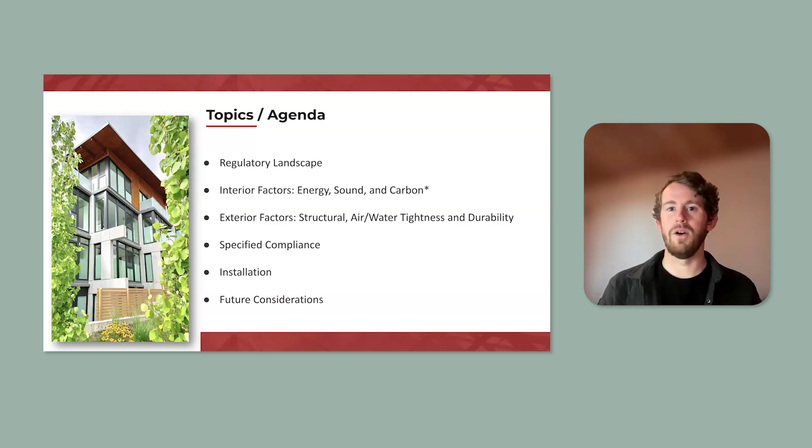All right, so right off the bat, as I mentioned, I'm going to talk about the regulatory pyramid. So right at the top of the pyramid are acts. Acts are legal requirements for an industry. Most industries have an act that's applicable. In the window and door market, we actually only have one in BC. Everywhere else in the country, there are no acts that are applicable. There used to be an Ontario Act, but that's actually been rescinded, and so that is no longer an applicable act for our purposes.

So acts are interesting in the sense that they typically act as point of sale requirements. They say you cannot sell this product unless you meet X requirement. It also gives enforcement levers to the province and to the federal government to determine, if the product is not meeting that compliance, how they deal with it. So that's kind of a unique thing, because as we go through the rest of the regulatory framework, you really don't have those levers built in.

So codes are obviously the most common item that we're going to be talking about when it comes to regulatory framework. It is really where most of our requirements on the window and door side come from, or at least explicitly. They are the thing that we all go back to, and they say, okay, this is a minimum requirement for a particular area, whether it be the NBC's model code or the provincial codes.

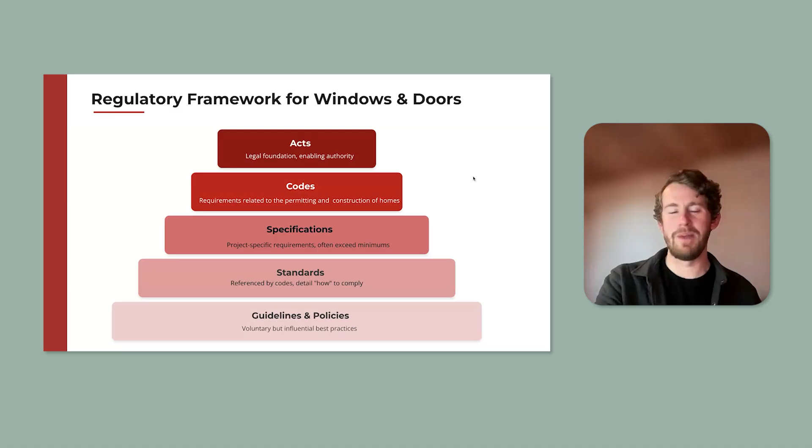I also wanted to help this group understand the difference between a Part 9 building and what is called a Part 3 building. You'll often hear me say a non-Part 9 building because calling it Part 3 is kind of comical, at least in my own space. In the window and door space, if we're looking at a multifamily building, you're actually regulated by Part 3, Part 4, Part 5. So I'll call it a non-Part 9 building.

For Part 9 buildings, these are small single family dwellings meeting a certain amount of square foot space. Really, your codes are going to dictate a prescriptive method, at least that's the intent. Part 9 was always designed as a paint by numbers type of system where you've got prescriptive requirements that you need to meet in order for that building to be signed off by an authority having jurisdiction.

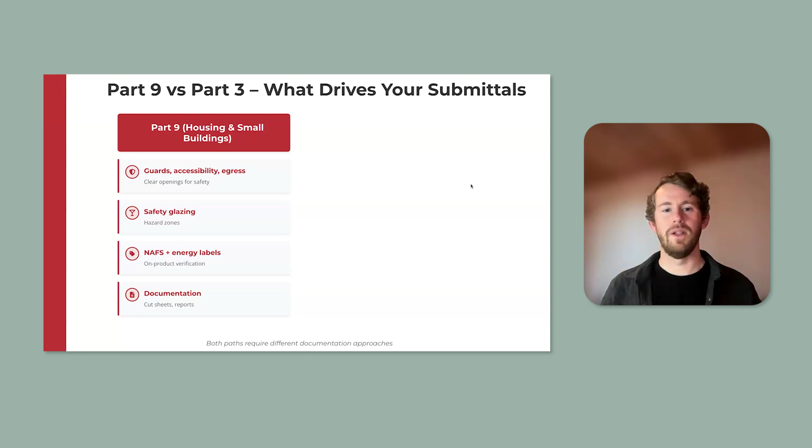Over time, that has become more complicated. There is some serious discussion, especially in BC, about what that future looks like, since we've got elements within windows and doors that become more performance managed than prescriptive managed. There's going to be continued conversations about that because it really did change the way Part 9 works. But on the whole, Part 9 leaves you with needing labels on your products, safety glazing with certain minimum requirements, and some basic documentation a project will ask for, but ultimately it's a paint by numbers system.

Part 3 is going to be more complicated because you're going to have consultants and engineers involved, and there's going to be a shop drawing phase the window and door manufacturer has to go through in BC and growing throughout the rest of the country. You're going to have Schedule B and Schedule C, which are professional sign-offs. You're going to have mock-up testing, which I'll talk more about in installation, but is absolutely critical because of how much risk a multifamily building takes on.

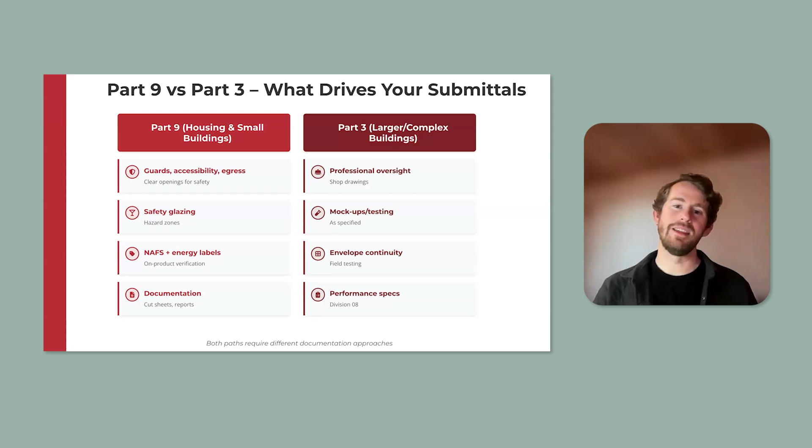You're going to do water testing in many portions of BC. You're starting to see air tightness testing. Toronto has some of it showing up, Alberta has some of it showing up, and you are seeing a growth of envelope consultants around multifamily buildings. And then you're going to have specifications that call out specific things beyond the code requirements or the act requirements.

We've got two areas we're really going to focus on today. First is the interior environment: how well your envelope maintains the interior space. Can your window and door keep the heat in or the cooling in? How much sunlight is going to add heat to that interior space? How clear is the glass you're seeing through? And what is the resistance to condensation for that product? That's interior environment.

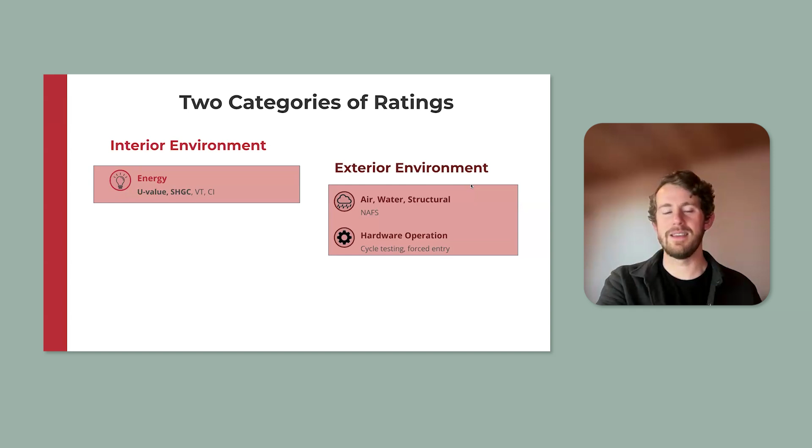Exterior environment deals with how well your product resists the outside pressures: air loss, water penetration, or structural support, how well your window holds up under stress. There is also a bit of hardware operation. I loosely call it durability of hardware, but it's the wrong word. Ultimately, it's how well your hardware resists use. It's a bit outside the exterior environment, but it sits within that certification or testing schema.

And last, I've got a series of other regulated metrics that I have a hard time putting into interior or exterior environments. Sound is one we can talk a little about; that's almost exclusively in the specification space. Egress and safety is one I wanted to spend more time unpacking, but with the handful of slides related to it, I found myself spending 20, 30 minutes explaining all these pieces, so I'm not going to get too deep into it. There's a little bit of glass safety we'll talk about, but if you have questions during or after the presentation, don't hesitate to reach out.

And then last is carbon. I'll admit, I'm putting carbon into this conversation because it's an early education item. I think our industry, windows and doors specifically, but probably construction as a whole, is a bit underprepared for global warming potential conversations.

But I think it's really important that we're starting to talk about it because even in the 2030 cycle that we are now starting the work for, we are starting to look at what the possibility of component embodied carbon numbers would look like. So I'll explain a little bit of where that's going. It will not be the end-all be-all of that presentation. That really needs to be its own unique thing, but at least I'll get you started.

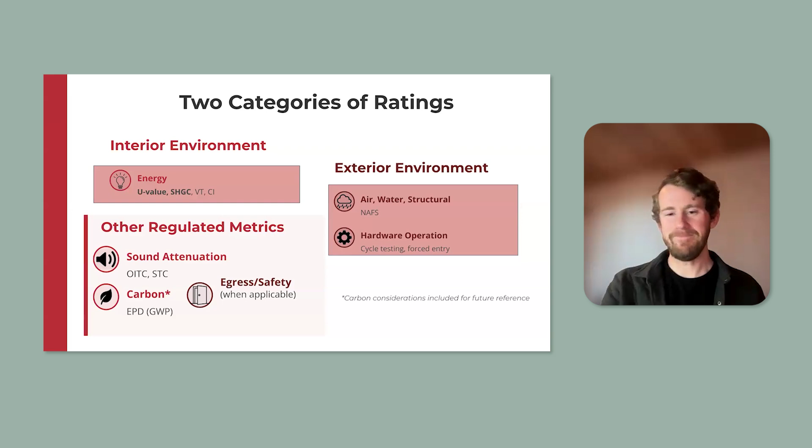So, as promised, I'm going to have a little bit of conversation about standards versus regulations, because this is an interesting piece that I kind of struggle with, if I'm being really frank. In an ideal world, the regulations give us explicitly what must be done in a building whenever you have a product. That would give the means and methods to dealing with what that product needs to do once it's in the building. And then standards, ideally, should be test methodology that provides the metrics that define certain aspects of that product that are applicable to how it's supposed to be used.

I'll admit that's not necessarily what's happening in a lot of cases. When we talk about NAFS specifically, it gives us a lot of instruction on what should be done. NAFS is the North American Fenestration Standard. I'm going to spend a lot more time talking about it in a minute, but it defines the structural, air and water tightness of a product. It also tells us when we are going to be applying labels, and a little bit of how they are to be applied.

In truth, the regulations have actually offloaded a lot of their responsibility to the standard. And so you get this confluence of what the standard should be doing, what the standard is doing, versus what the regulations do, which I think is sometimes why NAFS can be a complicated thing for people interacting with it: a lot of the requirements are actually embedded in the standard itself. We'll talk a little bit about that, but I want to frame this first because it is where things get a little complicated, in my view.

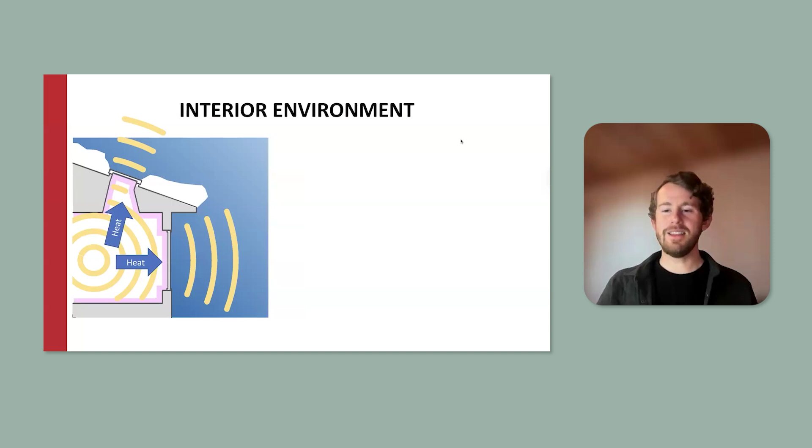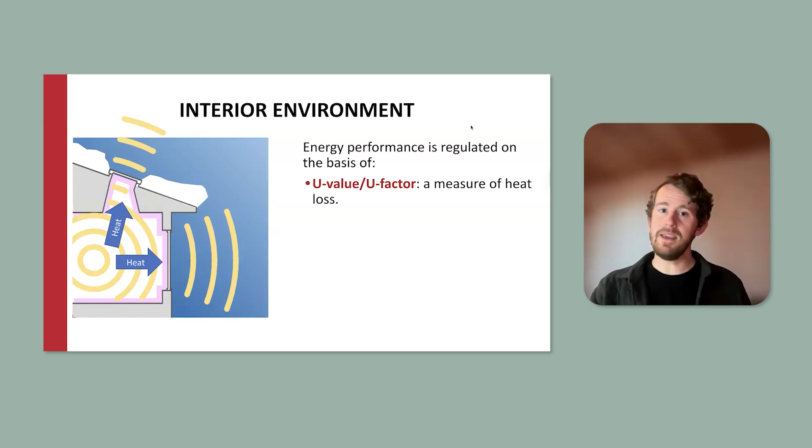So let's start into the nitty gritty of this conversation, starting with interior environment. Interior environment is regulated on the basis of U value, and in BC, only U value. We'll talk about what specifically needs to be on the label, but when it comes to the metrics you need to prove, your U value is the only piece you need to worry about. Outside of BC, especially in the National Building Code, the Energy Star system has what's called an ER rating, or energy rating. That is recognized as an energy compliance path through Part 9, so you could meet an ER rating in lieu of that U value.

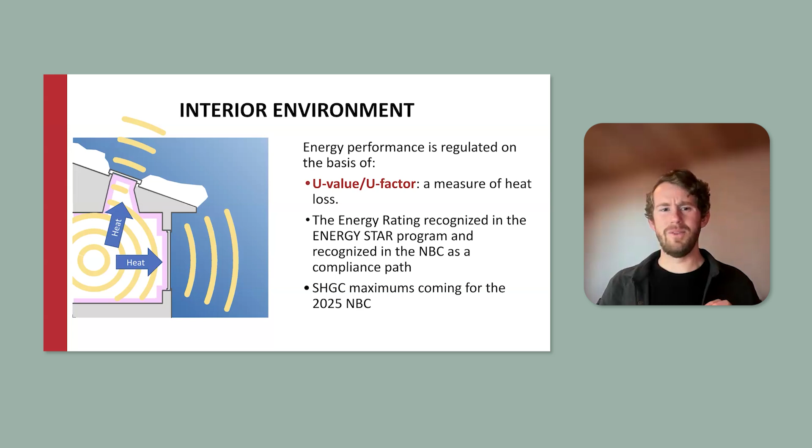I'm not sure how long that will last. There are definitely signs that some of that needs to change, and a portion of that is solar heat gain coefficient, or how much solar radiation is coming through that glass and being added to your interior space. There are some restrictions coming in the next version of the code. The issue the industry often has with an ER rating is that it prioritizes as much heat through that glass as possible; the way the calculations work, it almost views it like free energy. In Vancouver or Toronto, that's really tricky because your environment's actually pretty warm to begin with, and if you start adding heat, that can create overheating potential.

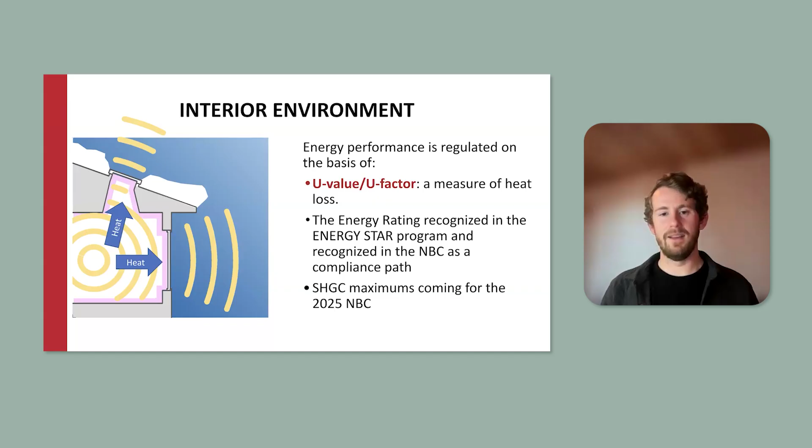I've got a slide that I'm going to do my absolute best to simplify; it actually came out of another presentation, so bear with me. We're going to get into a deeper conversation about solar heat gain. But for your purposes, U value is really your regulatory item. Solar heat gain is coming. ER, when you get outside of BC, is still an item.

All right, so energy efficiency acts. So as I mentioned, there's really only one, and we have it here in BC, that the BC Energy Efficiency Act dictates a point of sale requirement that no windows or doors can be sold into our market with a worse than 1.61 watts per meter squared number.

So, U value is, if you have a higher number, it is a faster loss of heat. If you have a lower number, you have a slower loss of heat. I know that oftentimes it's easier to view this as lower is better, but I think it's actually really important that we think about lower is slower instead.

So this requires mandatory product testing. Then there is energy certification and labeling, or testing and labeling. So you have to label your product in BC. And this act is actually one of the very few things that help create that requirement outside of the standard telling you have to label it. So there's a lot more to kind of poke at about this.

As I mentioned earlier, acts are one of those few places where enforcement levers are kind of built in. So the province or the Ministry of Energy and Mines has the ability to say, if you've got a product that's in the market that's more than 1.61 and it's manufactured, I should specify that, then you can actually have that window rejected at site, or it should be rejected at site. It is a legal requirement.

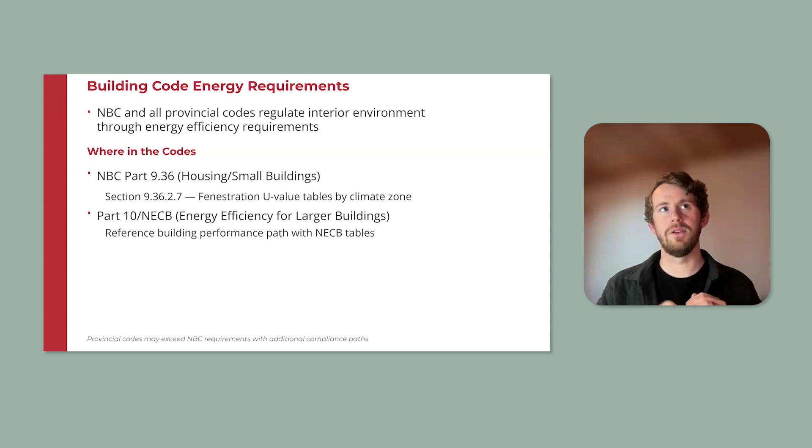All right, so when it comes to energy efficiency, where you're going to be looking to make sure that you are being regulated, in the NBC, that's going to be 9.36, and 9.36 is also going to be where you originally look for BC. I'll talk about provincial variations here in a moment, but let's start there because it gets weird once we get to BC. And then for a Part 3 building, you're going to be looking at Part 10 or the NECB for determining energy efficiency requirements for products.

Again, when you get to Part 3 buildings, a lot of this is performance based. So it's going to be an energy advisor that is going to be helping sculpt what the window requirements are, given the context of what you did with your walls and what you did with your insulation and what you've done with the rest of your envelope requirements.

So when it comes to provinces, BC is absolutely its own beast. It is so hard for me to help people understand outside of BC how BC works. The BC step code is my example of a guideline that has become a code. So, just because I think it's kind of interesting, the way that worked is that the BSSB uses what's called an OIC, so an order in council, in order to take this guideline and then apply it as an amendment to the code. And so, the OIC is oftentimes used as kind of a fail-safe measure to convert critical items.

So in BC, we have our BC step code, and it's a voluntary effort. So each municipality gets to choose what step they wanted to play in. Up until the last couple of years, where that change in the BC step code because of the OIC was then implemented for an absolute tier 3 baseline requirement. So all of the municipalities have to meet that tier 3 or that step 3 requirement.

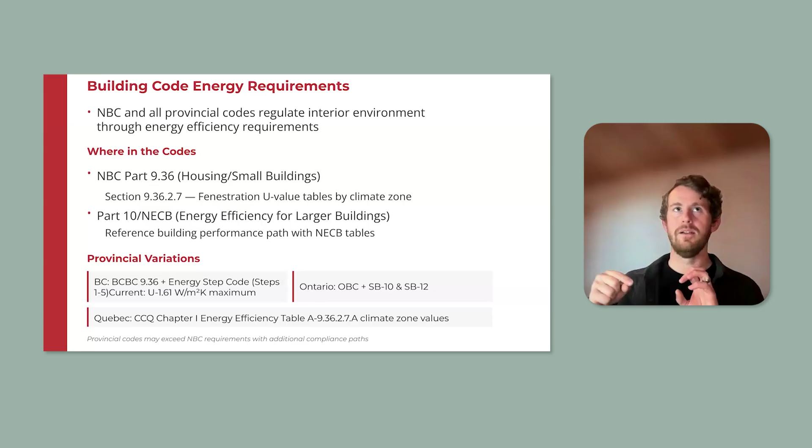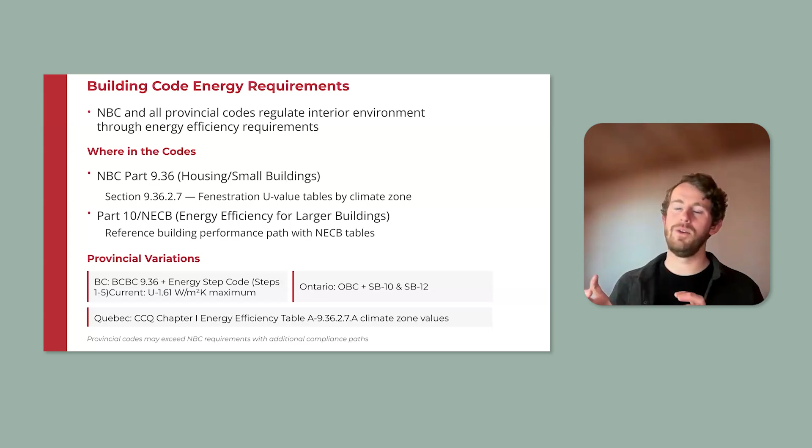What that means in practice, and especially for this last cycle and probably this cycle coming up, is that the provinces will do their best to remove what I'll call provincially specific artifacts. They are items or ways the code is written in their province that is unique, that really has very little bearing or difference from what the national building code does. And so a lot of the work that BC specifically has done is remove so many of those artifacts so that it is as aligned to the national building code as possible.

I think there's a misconception about the provinces needing to essentially adopt in full the National Building Code. That is not what's being asked of the Accords. What is being asked is that it is as close to that as possible. And if you have legitimate policy directives, then you can make differences to that, which actually gives the provinces a voice back to the National Building Code, that it allows kind of for this push and pull between code cycles

where one province like BC will have items that they feel are really important. And so they'll bring that back to the National Building Code, like, hey, we don't want to change this because this matters to us. And so then the National Building Code reviews it and decides whether or not that's appropriate for the rest of the country. Anyway, long story short, but I wanted to make sure I put in kind of that harmonization conversation.

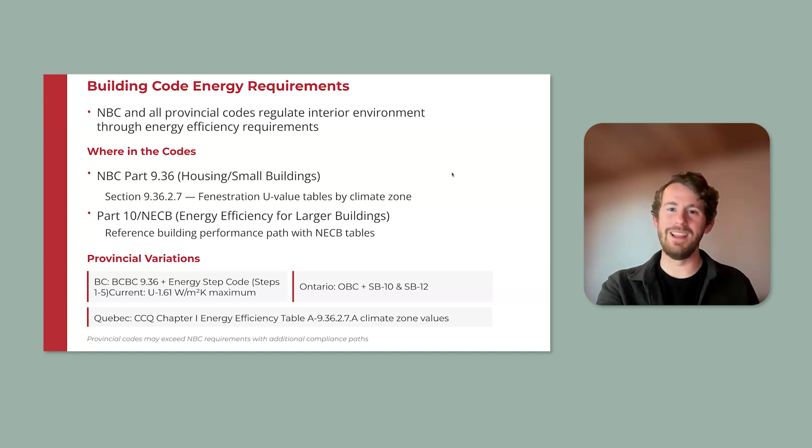So as I mentioned, I kind of went through the BC step code in Vancouver. Vancouver is kind of unique. They actually are a charter city. They have their own code. There's a lot to discuss about that, and I'm not getting into that here. But the Vancouver Energy Modeling Guideline is a really good example of a guideline that has become a code requirement. And the reason that has happened is because both Vancouver's code will reference the Vancouver Energy Modeling Guideline and the province's code will reference the Energy Modeling Guideline. And so the requirements that are outlined by the guideline then become codified.

BC Housing guideline for part 3 buildings is a great example of it; it winds up illustrating the requirements for a part 3 building when you're working with BC Housing.

I'm actually really grateful. BC Housing has spent a lot of time with us in the last little bit working on specifications and cleaning up the window and door side. So anybody from BC Housing, thank you very much for all the effort you guys are doing. We can see it. I'm acknowledging it.

The Toronto Green Standard is interesting. I think it's gone through a bit of a wringer in Ontario because of some of the changes; there is an act that came through that made something like this guideline not applicable. There's push and pull there. I think Toronto is pushing back, and I think probably for the better, in the sense that it's similar to the Vancouver Energy Modeling Guideline, where this is Toronto trying to say we would like to take a more aggressive stance on this particular item. We believe we have the right to do so.

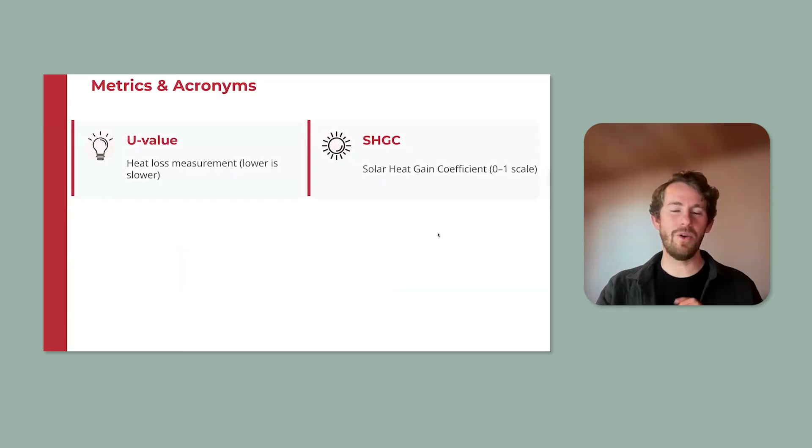On their CPD site you can actually look up the manufacturer and look up all the different certifications that they have for their product for the various types. We're going to talk about the complication of that here in a bit, but for now, these are the two test methods. So those two test methods are going to provide us U value, solar heat gain coefficient, condensation index,

and visible light transmittance. Your U value is going to be determined by a hot box or a guarded hot box test. So you're going to have a warmer interior space and a colder exterior space, and then you're going to be able to test what the heat loss is through that element.

Solar heat gain is you're going to have the visible light transmittance. So I think it's 390 to 730 nanometers, if I remember my numbers correctly. But in that space, that's your visible light. And then you're going to have a spectrometer or a spectral gadget that is going to help you understand how much solar heat gain you're getting through that glass. And it's going to be on a scale from 0 to 1. 0 being no solar heat was able to get through that, and 1 meaning all of the refracted heat and bounced heat was able to come through that.

Windows are, I mean, there's a deeper conversation about this, but for the benefit of our market, we have to use low E coatings in Canada. And so you're going to have anywhere between like a 15% up to 60 or so percent amount of solar heat gain that you could have.

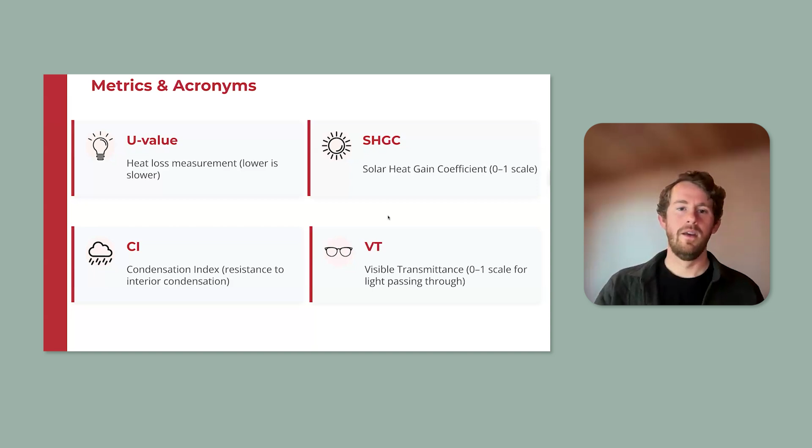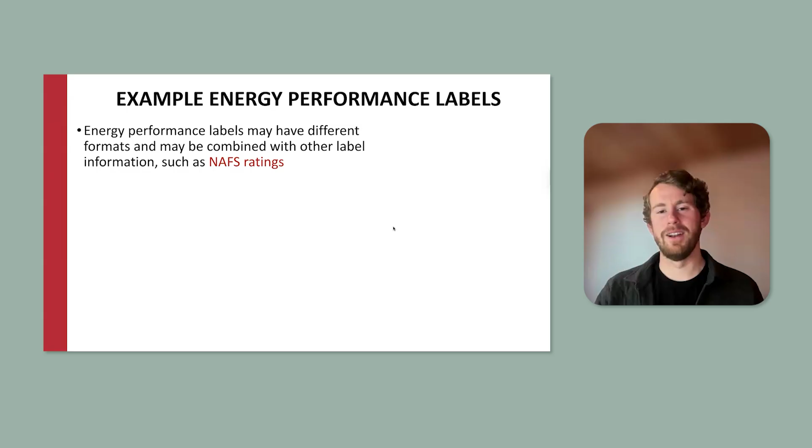All right, so I wanted to give some examples of energy performance labels so you guys could actually see what would be typical to see on site. So energy performance labels are kind of funny in the sense of there isn't a nice, this is the format you need to use every time. There are specific bits of information you need to use, but they can wind up being combination, like this one on the right hand side. They're like combination NAFS labels and an NFRC label.

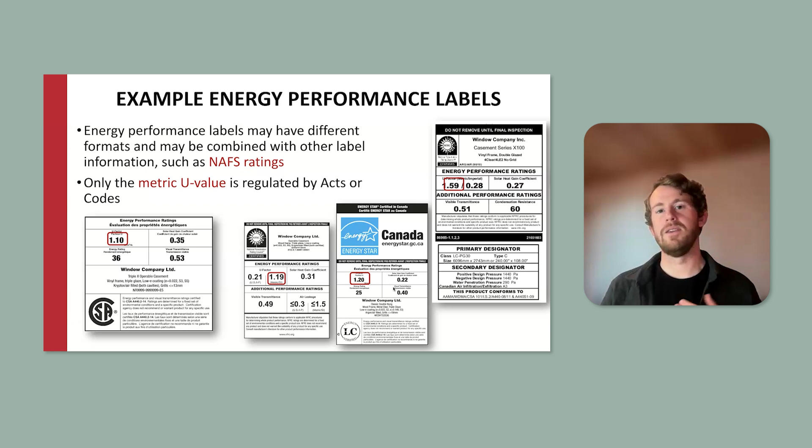But it is worth noting the only metric here that is a regulated item is a metric U value. That needs to be on the label regardless. And so this like 1.10, 1.19, these are all items that absolutely have to be on there. They provide the solar heat gain, energy rating, visible light transmittance, condensation index as, you know, these are things that we already tested for, so they're now available to you on the label.

So the actual label requirements, whenever you're dealing with a temporary label: all products in Canada need to have a temporary label for both the energy efficiency and for NAFS. So you're going to have a U value in metric that has to be there, the name of the manufacturer has to be there, and the certifier has to be there.

I'm going to talk in the next slide about permanent labels, so I'm going to just put a pin in this particular one. But yeah, having a temporary label is an absolute requirement, and in BC, a permanent label is a requirement. I've given a couple of the recognized certifiers just so that people have an idea.

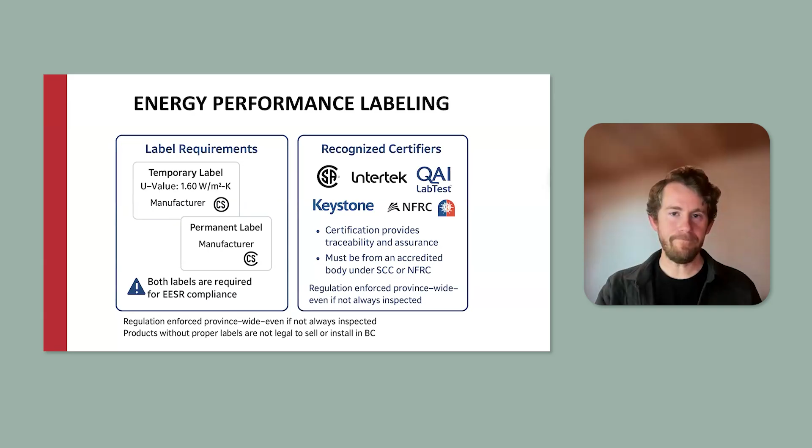So when we're talking about CSA A440.2, again, you need to go through the process of actually looking at each one of the certifiers. If you want to verify the information that you've been given, you've got to go to these guys in order to figure it out. Ideally, you just ask your manufacturer and they will either give you the test labels or they will tell you who that certifier was. So, permanent labels.

It is not defined by any of the codes. The NBC doesn't do it, BCBC doesn't do it, VBBL doesn't do it. So the reason why they're a regulatory item within at least BC is that the building officials of BC created an interpretation that pointed back to a Fenestration Canada labeling guideline that said that you need to have it. So this might be one of the most roundabout ways to create regulation, in my opinion, but in BC, a permanent label is required.

So if you're looking for a permanent label, the definition is that it's not intended for removal without destroying or defacing the label or the product. So a permanent label is going to be on the spacer bar, it's going to be on the glass, it's going to be on the hardware, or most commonly what I've seen is this gold label that sits on the inside of a sash. That's kind of the most common thing that you'll see.

But it is worth noting the rest of the country does not have this requirement. Though I will say, colloquially, the window and door manufacturers just see this as a requirement because if you have to sell your product into the US, you have to have a permanent label. So that's kind of where it has become a commonplace regulatory item without actually being called out as a regulatory item.

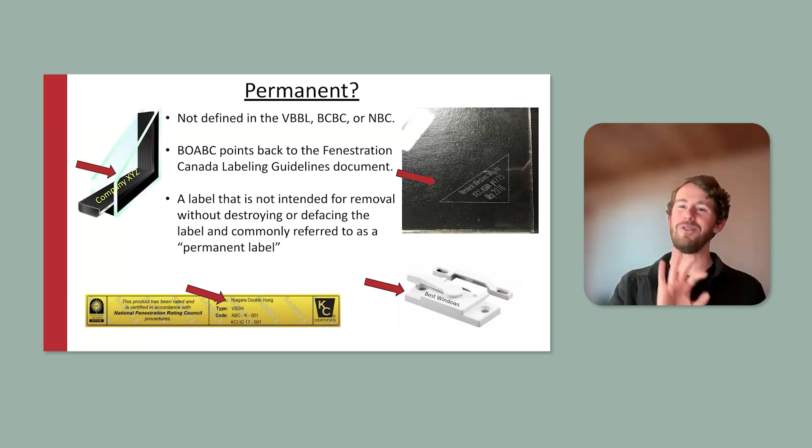So I think it's really important that we have a discussion about standard size versus project size. I think this is something that is just frankly kind of missed in the big scheme of things. But when we go through certification for our product, on the energy side specifically, we have a series of standard size measurements. Really, in the energy space, we're dealing with an apples to apples comparison.

If you buy from window company A, they are going to be testing the same size type of configuration as window company B. So that gives you the ability as the purchaser to see, well, this company performs this way and this company performs this way. So a casement, for instance, is going to be 600 by 1200 millimeters, or about 23 and a half by 47 inches. So the weirdness there is that if you've got a project size that is bigger than that,

your center of glass value, whenever you're looking at windows, is typically significantly more effective than your frame values. So the further you get away from your center of glass, the poorer that window is performing, or the less resistive to thermal loss that window is. It is slower at the center of glass than it is at the edge of the glass.

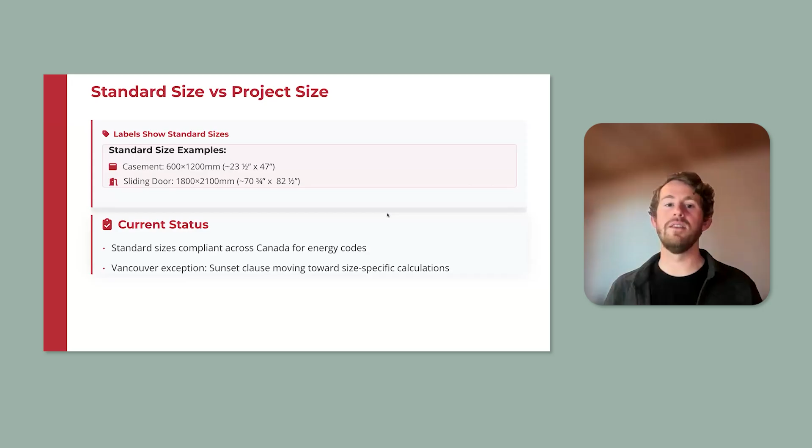There are no expectations of not using standard sizes, even in Vancouver, where there was an item in the energy modeling guideline that asked for size-specific calculations. There is a sunset clause now built into the VBBL for the next 2 years while the industry gets a size-specific calculator launched, which I am really happy to say, luckily Terry Admonson is on this call, and I believe the last time we had that conversation, it was like December 6th.

It's going to be next month. We're trying to get a size-specific calculator launched. And so you can go to Fenestration Canada and you'll be able to take your standard size configurations, put the information into that calculator, and get specific size calculations for your building. And so I think that's a huge step forward personally, that the accuracy of the windows has always been a bit of a question mark.

And U value is one thing where I think there's kind of an acceptable delta within what happens in a bigger size window versus a smaller size window when you're thinking about thermal loss. But on solar heat gain, it is wildly different. And so I'll kind of get into that in the next slide, but expect that's coming. That will be on our site. So look for it by the end of the month in December or early next year, and you'll be able to start using that.

There's also a guidance book that we're creating right now that'll be really helpful for kind of going through the process. It's great for like a multifamily project. We can run through that calculator in 20 minutes and give us exactly what the actual calculations are for the windows. So why this matters for solar heat gain.

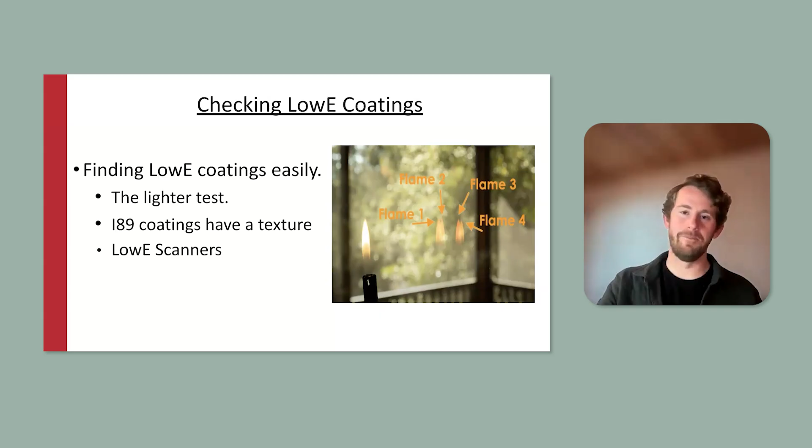I89 is a hard coat that is applied to the interior surface. That's going to have a texture. If you can feel it, that's probably what that is. Otherwise, somebody screwed up and put their low-E coating on the inside, and that's going to be weird and blotchy later, and it'll be really obvious. There's also low-E scanners, so you can use a tool that'll tell you exactly what low-E coatings are there.

All right, so that gets us to the first of the interactive slides and kind of one of our first benchmarks. So I've got a project. The location's in Vancouver. It's a 6-story multifamily building. It's used as residential. So my question to you all is, now that we've talked about interior environments and based off of what you guys think, what's the most important check you could do to de-risk interior environment compliance? Like, what can you do to make sure your building is safer when it comes to the interior comfort of your building, or whether or not your products are actually meeting what is expected?

Do you see any of the answers there, Adrian? I don't. Okay, well, I can share them with you. I have them opened in another screen here.

So we have sound mitigation, solar heat gain, understanding product, use of high performance windows, solar heat gain control, ensuring labeling on all windows and doors, low E coating inspections prior to install, overheating, use an energy advisor, U value and solar heat gain coefficient, check solar heat gain coefficient, change from sliding door to casement window, verify window specifications and verify once installed, structural, U value, supplier feedback, window air tightness, labels, ensure specs accurate for building elements, and U value and condensation index. Okay, that's great.

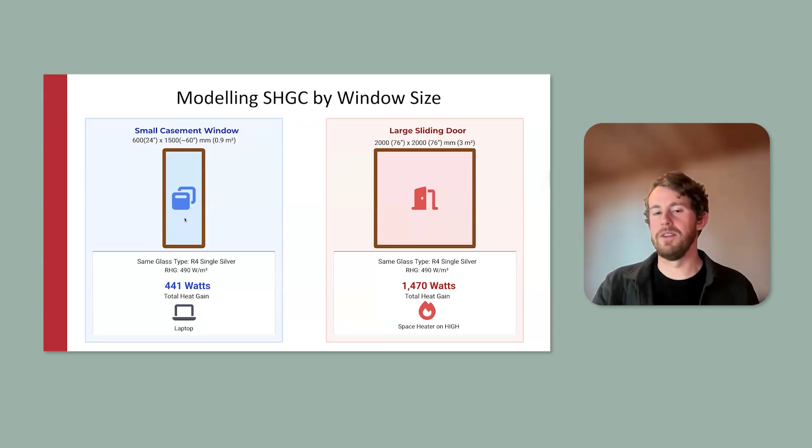There's actually a whole chart that I could send you that gives you a breakdown of zero silvers versus three silvers, and when you're applying it to multiple surfaces. But for your benefit, this is going to be probably about a 0.44, 0.45 type of solar heat gain.

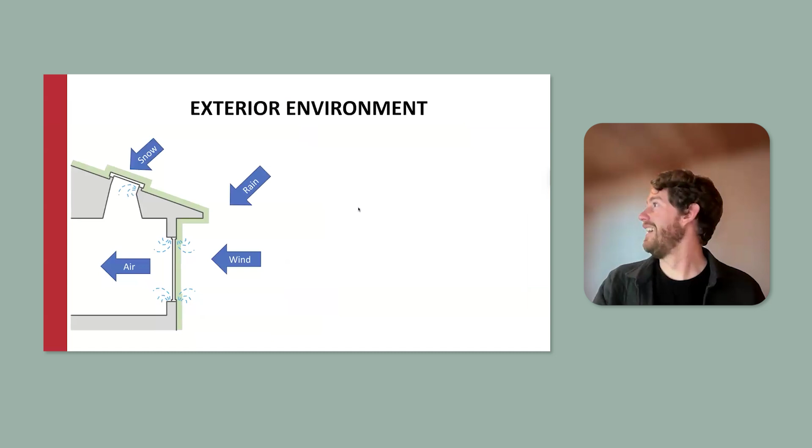So exterior environment. Again, what we're talking about is the products are able to resist exterior load. This isn't going to be anything to do with human occupant load. So guard, for instance, is not defined by NAFS. And anybody on this call that has that confusion, feel free, reach out. We can have a long conversation about guard when it comes to glass and frames, and it's a whole other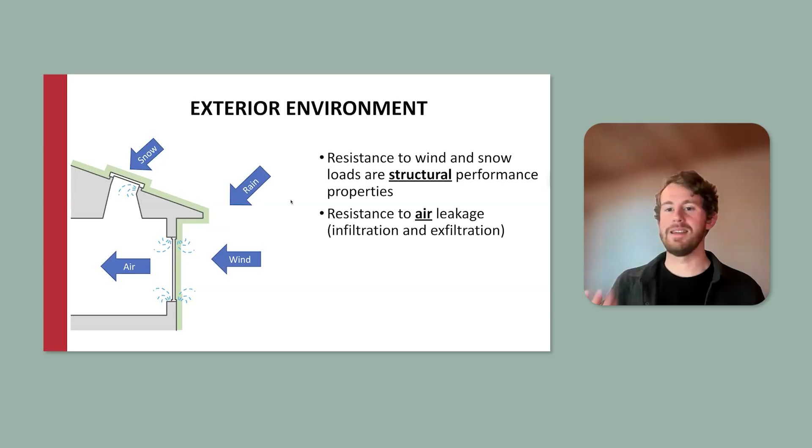conversation. But what NAFS is supposed to do is tell us how is it able to resist snow load? How is it able to resist wind load? How is it able to resist torquing and pressure on its corners? How well does it resist airflow through the product? And then how well does it deal with water penetration when it comes to the product?

So in the building code, this is called out mostly in 9.7. So 9.7 has a whole bunch of items that are related to it. There's also some call outs in part 3, or part 5. It is worth noting, in BC, we have a unique opportunity where the building code is going to give us in a non-part 9 building the ability to engineer some of the tests that are related to NAFS, or the things that might be slightly askew from the testing environment within NAFS.

When we get to the national building code and the rest of the provinces, they've adopted the 2020 change, in which there is no additional engineering path that you can take outside of what's defined. That's a much bigger conversation, but it's probably worth noting that in BC, you still have a fair bit of flexibility with the engineering world to determine what is appropriate, though NAFS gives you some of the best methods that we have in our industry. So that's a little bit of where in the code world it exists.

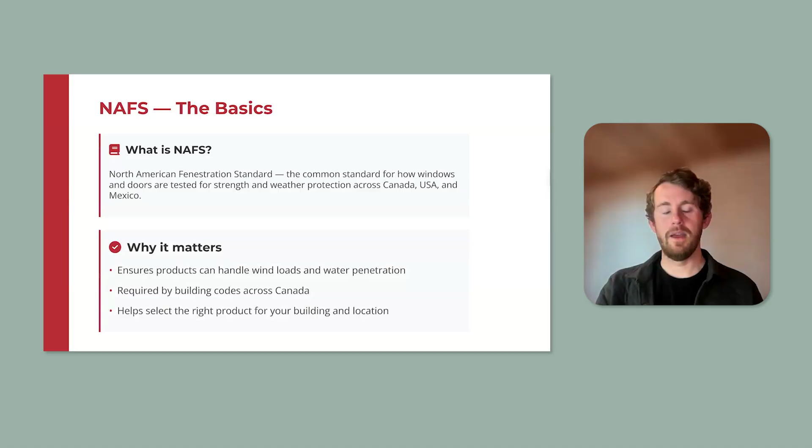NAFS is the North American Fenestration Standard. It is how all of this is dealt with. NAFS is managed by the Joint Document Management Group, which is a combination of CSA and, on the US side, WDMA and FGIA. So those three parties work at creating a harmonized standard between the US and Canada. I'll talk about S1 in a second, but I want to talk about a few of the basics around it.

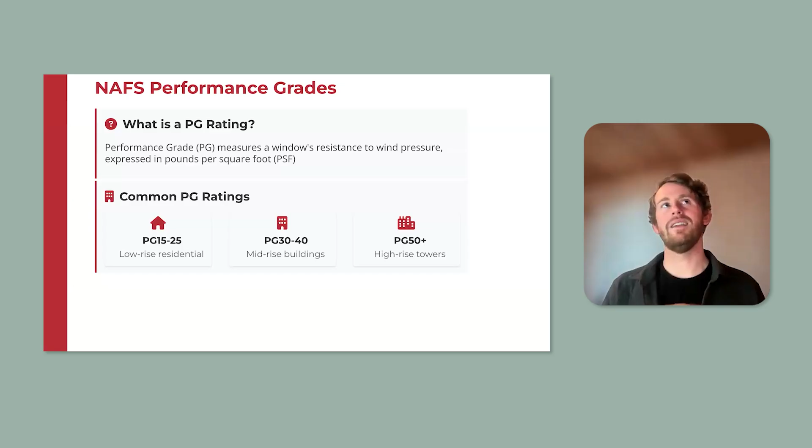So PG is a performance grade. This is a combination metric that you get based off of the window's resistance to wind and structural pressures and water pressure and the location. I'm giving a couple examples of what you typically see for different types of buildings. For a single family home, PG 15 through 25 is expected. PG 30 through 40 is expected for a mid-rise or multifamily building. And then PG 50 plus is typically on high-rise buildings. Even saying that is a bit of a tricky thing, and I'll get into it in the next slide.

But you get into performance classes. Performance classes, in my view, is actually a better way, in combination with performance grade, to help define what's appropriate for different buildings. Each one of the performance classes has gateway testing that they have to do. For R, it's pretty simple. LC adds a little bit of durability around hardware. There's a few other tests that are involved. Between LC and CW, they start what's called the L over 175 deflection requirements.

And I'll call it a miss in the engineering world, but when you get into multifamily, an engineer really needs to be able to say that the product meets that L over 175 in order to meet their own professional engineering requirements. But with NAFS, because of the way the standard is written and the way the code points to it, it actually allows the engineer to say, well, if you've got your NAFS testing and it's meeting the appropriate performance grade and the specifications, I don't actually need to look at whether or not it meets that L over 175.

That's one of my little dirty secrets for the industry. I apologize to my industry.

AW is complicated. In my view, it's very much designed for aluminum windows. It has changed actually a bit in the last iteration of NAFS, and it's actually brought some of the rest of the window world into it, but it had really strict limits that as a material type was only really achievable by aluminum, and then some of the fiberglass companies I think have gotten to a place where they're pretty comfortable in that space.

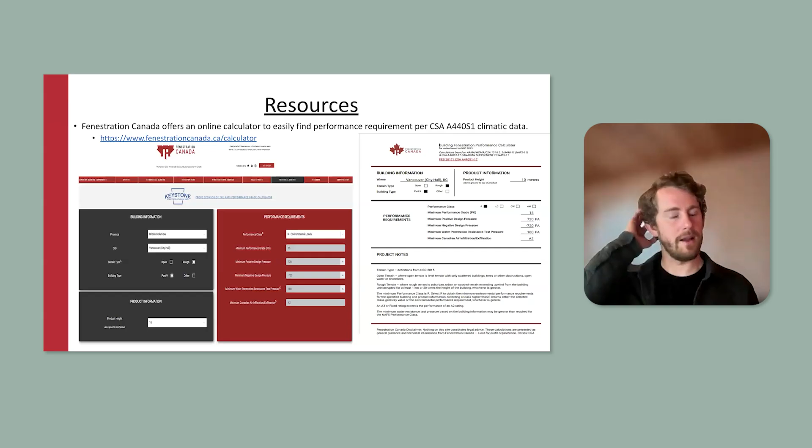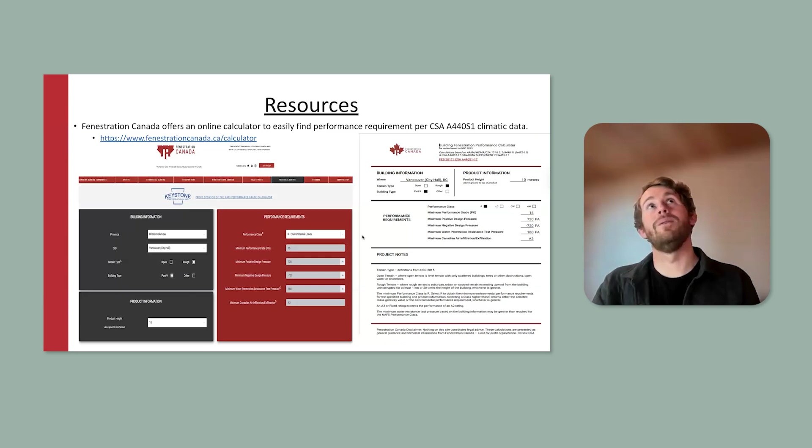I oftentimes used to use this in multifamily buildings whenever there was kind of that debate about what was expected. To just give them the PDF printout that comes out of this calculator, and you give it to the architect, or you give it to the developer, or you give it to the specifier, and say this is probably what's appropriate for your project. So I can't speak highly enough of the tool. I think that was a great thing that we did about eight. Actually, I don't know how long ago that was. I think it's 8 years now, but it might be a little bit longer than that.

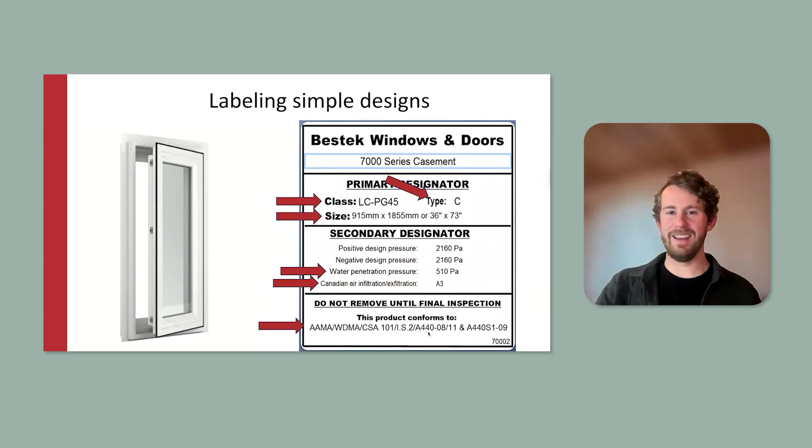Air infiltration, a lot of this A3 type of work is actually now being replaced with actual metrics, but that's a slightly different conversation. And then this at the bottom is going to tell you what it conforms to. So, if you were to see this particular label on site right now, this is not meeting compliance. So, what this is saying is that this is A440-08 and 11. So, it was tested to these two standards. Where you need to be right now is 17 in order to meet compliance.

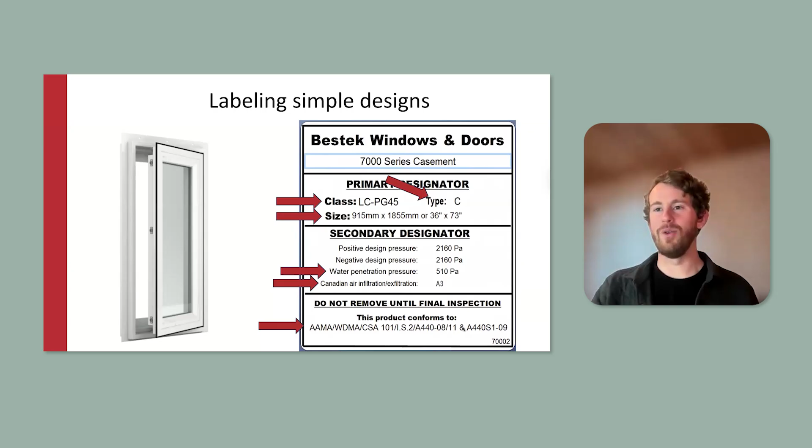And I would say if this product was going through the same testing schema that they were doing then, it would say 17 and 21. And then S1 would be 19. So that's what that label right now should say. And we're going to get a little bit into the complication of NAFS when it comes to being compliant, but yeah, let's go through the rest of the product types.

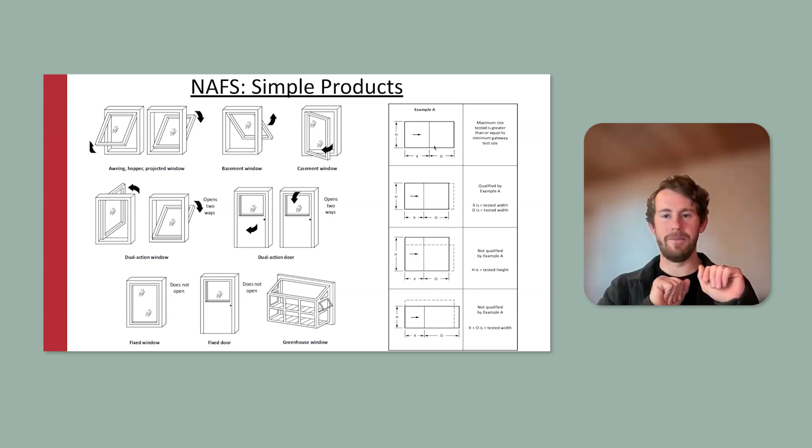So this gives you a bit of an idea of the various product types that you could be testing for, and each one of these is going to have its own unique methodology for testing. So when I was talking about the size, on the label, if you've got that max size, let's look at example A. So we went to the lab and you test an operable window next to a fixed window. The window is 24 inches by 24 inches.

Then you put a window on site where the operable gets shrunk and the fixed window increases in size to make up for that difference. That's okay. That window is still within compliance because the total size of the tested product is still within those parameters. Now, if you were to expand the size by height or by width beyond the tested size, that no longer is meeting the compliance.

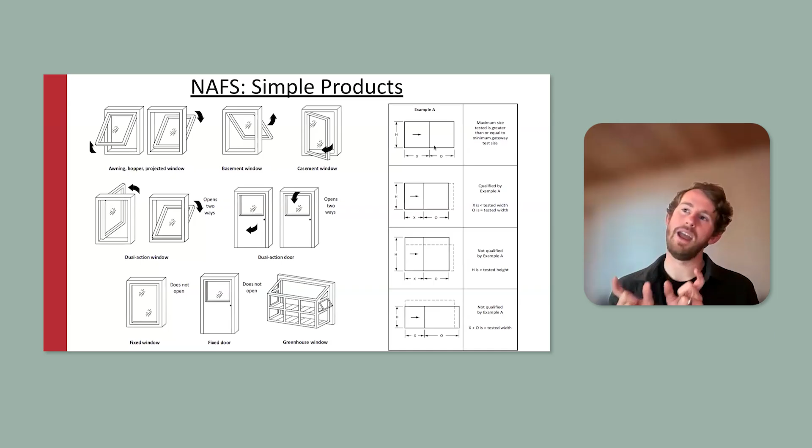In BC, that would then require either another label that would be appropriate for that tested product, or it needs a Part 5 compliance path. So a letter of assurance from an engineer that that product is going to meet the project requirements given what they have for the NAFS testing. Again, throughout the rest of the country, that's not an option. You don't have that path. You have to test that product via NAFS.

So I want to go through a little bit of combination assembly so you understand how complex this gets so quickly. So let's look at the product on the left side. What this tells me is that on the left side of the product, they have a window that's, let's call it 18 inches by 36 inches. It was a fixed combination window. That window combination had some variance between those mullions if they did mullion testing.

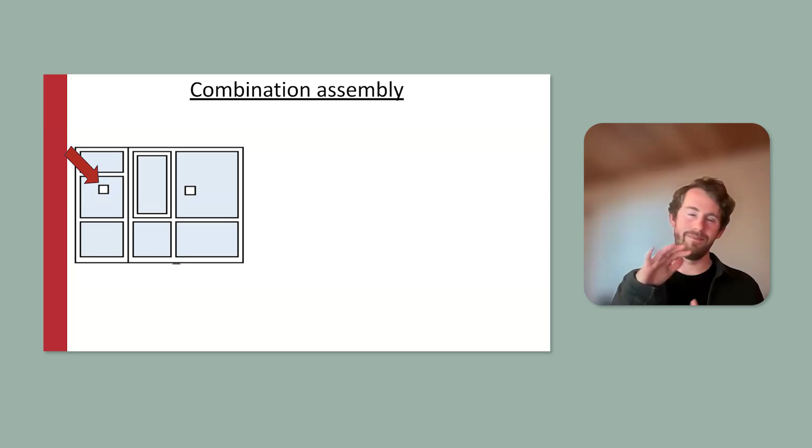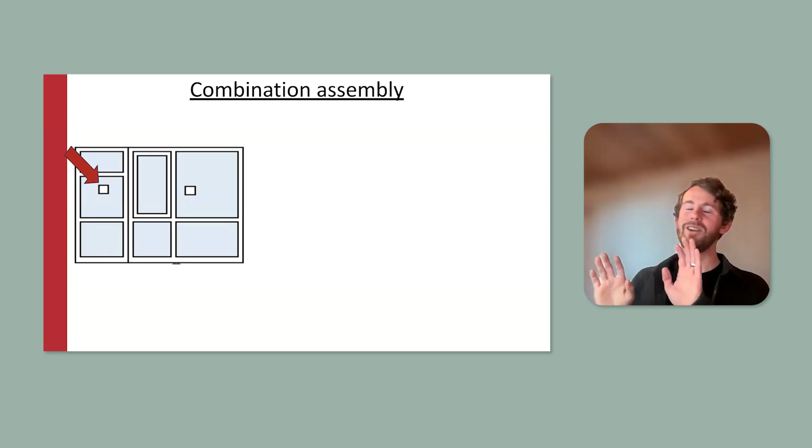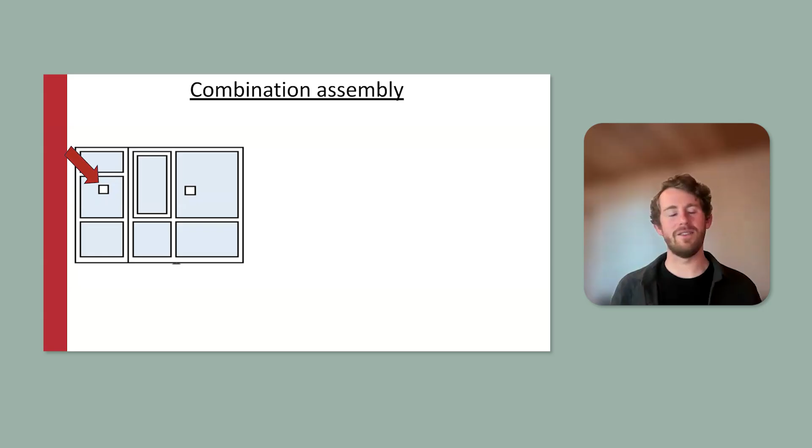Let's just say for simplicity's sake, they've got this fixed window, it's tested to that size, that's appropriate. And then on the right-hand side, that would mean that they would have had to have had that operable fixed over fixed combination that they tested. So, based off of these last three slides, you can appreciate how this gets out of hand really quickly. You wind up having to have all of these different test combinations, and it's not a cheap thing to do.

So you've got another window that does this operable next to big fixed window. If you were not to have tested this configuration, but you tested a fixed and an operable, what you'd have to do is put a label on this window and a window label on this window and a label on this window, all for separate test methods, in order to meet NAFS compliance.

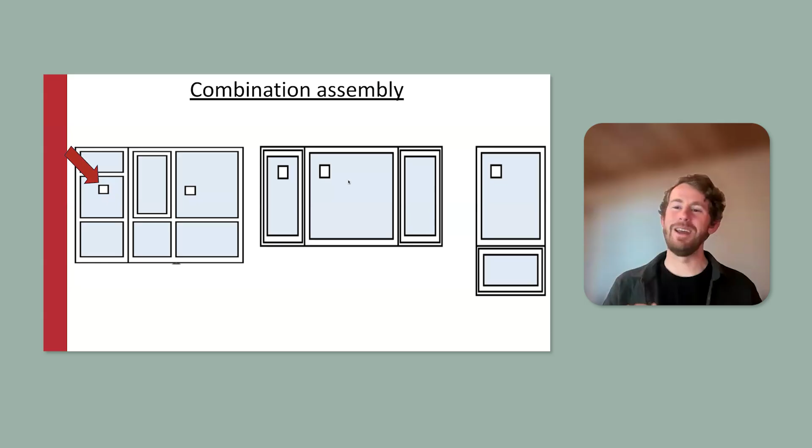So I wasn't quite sure where to shove glass compliance into this, so this is where I'm going to do it. Glass is one of those weird compliance items that is probably one of the more critical, because if glass isn't meeting some of the standards of North America, we're going to feel it, meaning it breaks easy, it has wavy weirdness that we haven't seen in a while. But you have to go through what's called IGMA certification in order for the glass to meet some of those strength requirements. So a factory has to go through that and test that their glass is meeting that compliance.

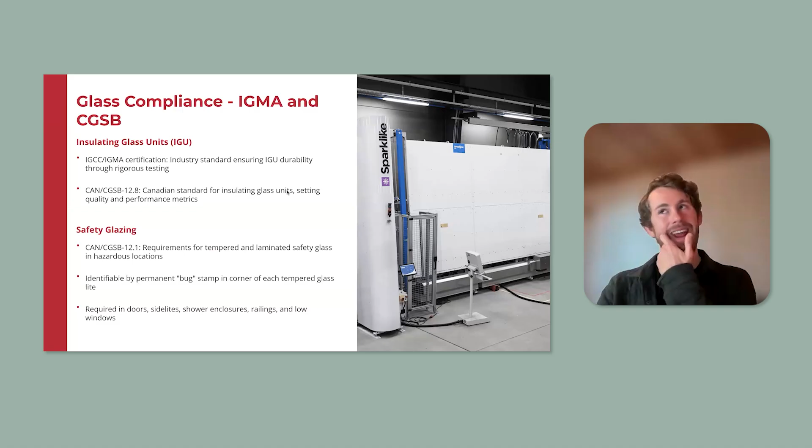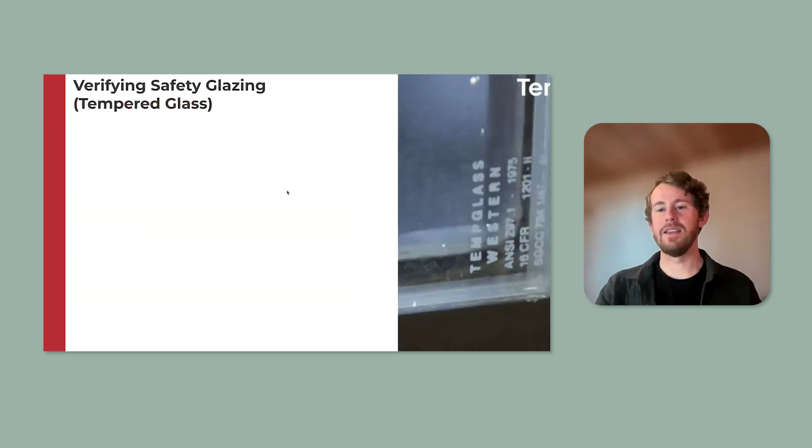And then if you've got an IGU unit that is not tempered, it's meeting a 12.8 CGSB standard. So these two things have to be done, and it's actually kind of hard to check for that compliance. But what is easier to check for compliance is if you have safety glass on site, like a tempered or laminated piece of glass, you're actually going to have a stamp on the glass in one of the corners, depending on how the IGU goes into the frame, that tells you whether or not that glass is tempered. This has got to be one of the easiest ways for you guys to check whether or not that tempered glass is there.

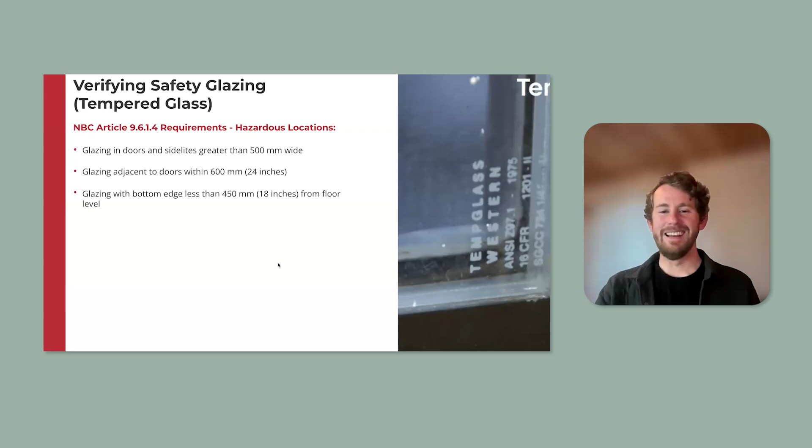So I mentioned I wasn't going to deal with some of the safety glass requirements. A little bit right here. So glazing in side lights and in doors have to be tempered. Adjacent to doors, so side lights adjacent to doors have to be tempered. Bottom edge, this is incorrect. I'm going to fix this in another slide, but ignore this bottom section almost entirely. There is a 900 millimeter to the ledge. Too complicated to go over right now. I'm going to run out of time. But if you guys have interest in when guard gets applied and safety gets applied, please reach out.

I will outline that in an email because I've had to do it many times, but that's irritating.

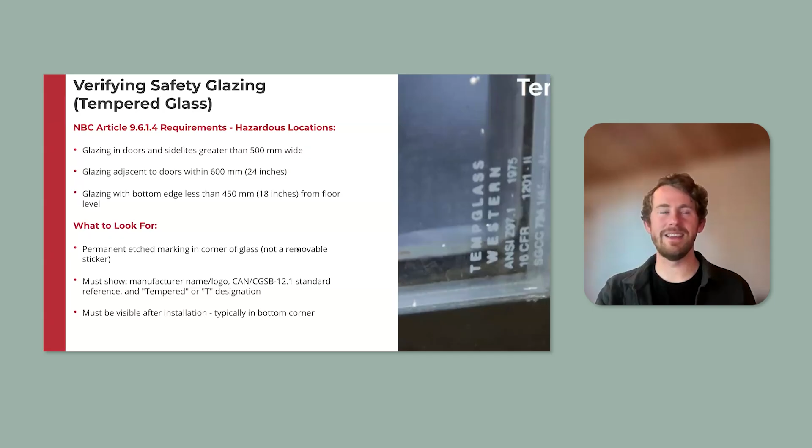So this etching in the corner, I've never heard it as a bug stamp, but as I was doing this presentation, apparently people call it a bug stamp. So tempered glass sitting in the corner, T designation. Ideally, it's in the bottom right corner or the bottom left corner, but again, it depends on how people put that IGU into the space.

So this is our next project scenario. We're going to be in Toronto this time. It's a single family home, new construction, residential. So based on what you've learned so far, or what you've personally experienced, what are some exterior environmental factors that the builder should be focused on?

Perfect. So I just ran that poll and in the interest of time, I know we have 20 minutes left together. While the poll's running, I'll ask a few questions that have popped in the chat. So Tamara asks about requiring labeling on windows. She's wondering if the labeling requirements are specific to the glass or the glass in the frame, and the context there is whether you can use labeled glass to make your own frames in residential renovations.

Understood. And that's actually something I probably missed early on: when we're talking about compliance with NAFS labels or NFRC, these are all things that are frame and glass. Those two have to be together when we're talking about any of our label compliance. So you don't get a label for the glass and put it into a random frame. That will not produce the results that are reasonable to assume on site. So yeah, it has to be frame and glass. If you're just putting a label on the glass and then putting it into the frame, that's going to be off.

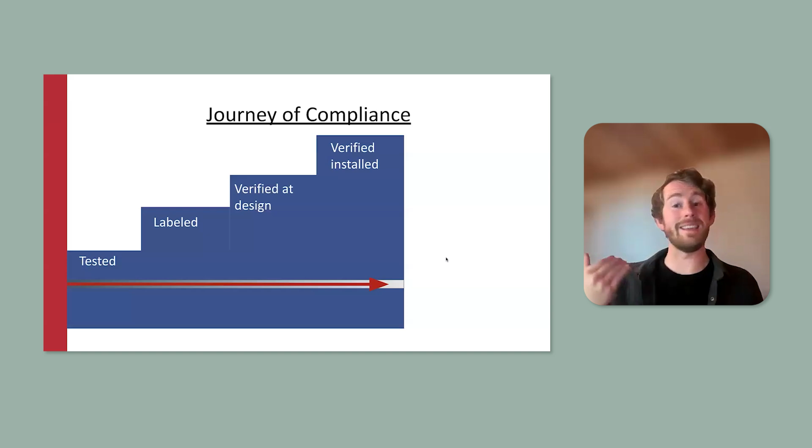Hopefully with some of the basic information you've gotten here, you can decide, between the NAFS calculator at Fenestration Canada or some of the fenestration examples, what you're hoping to get out of the project. And then ideally, you're verifying it at site. The product that you bought has the label that's appropriate, and that's the absolute best case scenario that can happen.

So I've talked about specifications. I want to just lean into specifications or critical contract documents. It is really, really, really important that the specifiers and the architects are not putting specifications out that don't make sense.

I see way too much copy paste in that world. It really needs an oversight, and I realize how much is going on in the background, and specifications are the last thing anybody wants to read through, and most of it none of us understand unless you've spent time in that space. But if you don't, then reach out to some suppliers, reach out to Fenestration Canada, let us help you go through some of that because this is a contract document.

I can't tell you how many times I had to fight builders on the specification called out something ridiculous, and then I was asked to meet it, or I was being told, why are you not meeting it when the energy advisor asked for something that was slightly ridiculous? No offense to energy advisors on this call, it just happens.

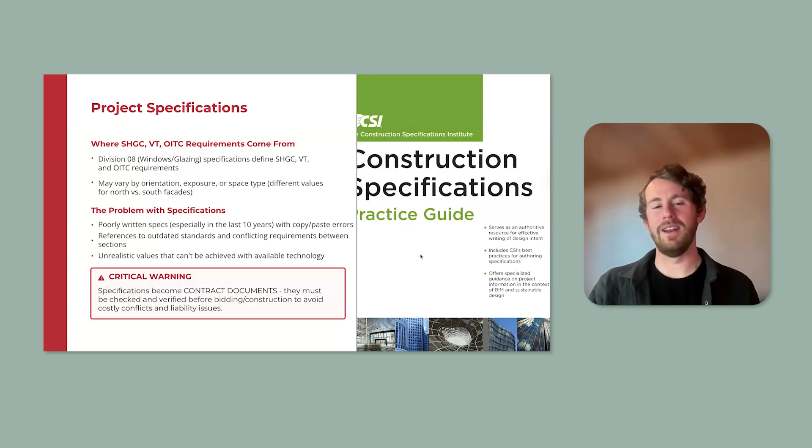But I just want to lean into project specifications are really important as we get into like OITC, VT, solar heat gain numbers. This is the specifications where these things are going to show up. So if the acoustic numbers don't make sense or the expectations around acoustics don't make sense, you're going to put the supplier in a really uncomfortable spot to have to deal with that.

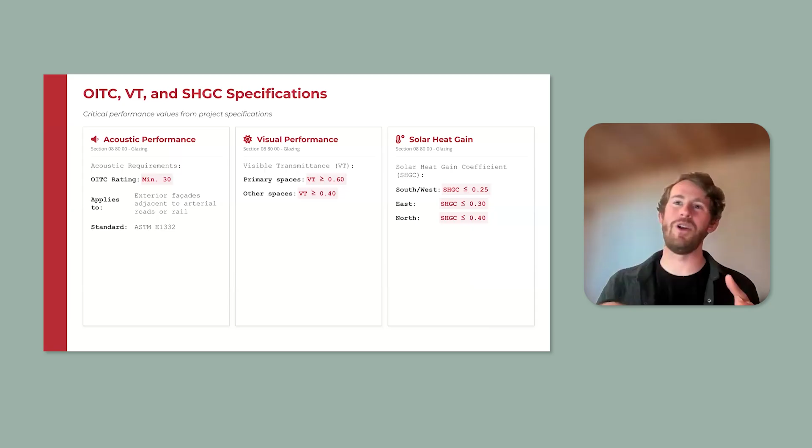Visible light transmittance. A lot of what I see with VT numbers is that they're calling out center of glass VT numbers and not combination assembly, meaning frame and glass combination. If you're only getting center of glass, that means something very different than if I incorporate the frame as part of that calculation. So that's really important. And then again, solar heat gain is pretty much only going to show up in specifications.

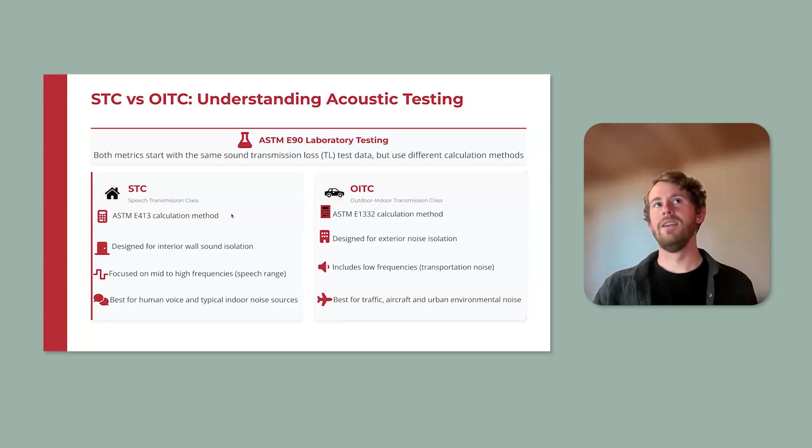I was going to spend a little bit of time talking about STC versus OITC, but I'm going to kind of gloss over this and give you a broad stroke. STC is essentially inter-party wall type of dynamics, meaning between this wall and the wall on the other side, the sound penetrates a certain amount. And so there's a test method that defines that. OITC is outdoor-indoor transmission class. So that has to do specifically with the sounds that are outside of your building versus the resistance that glass and that frame has to it.

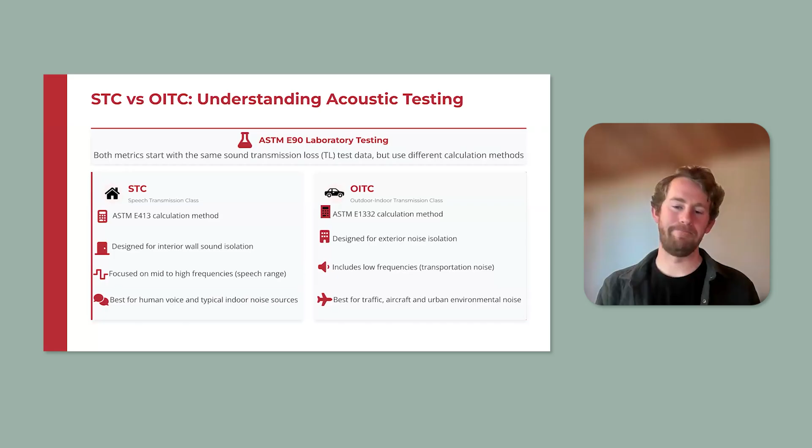OITC is something that's often called out in projects. There's a lot of work, in my opinion, in the window and door industry to get to a place where this conversation makes sense. Right now, it's being done haphazardly, meaning the testing is haphazard. It's really hard to get the right information. And frankly, the sound needs to be defined by the project site because there's different sounds that have different frequencies that impact the choice of windows differently. We could have a lot more conversation about this, but for the benefit of time, because install is important to me, we're going to kind of glaze through field testing requirements.

As I mentioned, it is really common for 2/3 to be kind of the performance expectation. So let's say I sent a product in for NAFS testing. It came back as, you know, 700. And so what I want to do is meet like a 460 in order to meet that two-thirds expectation. That's usually reasonable, but this gets back into, did the manufacturers apply their labels appropriately from NAFS? Because if they have certain configurations that don't represent the configurations that they're giving, then they could have aspects of that testing that just isn't representative of what you're going to get on site.

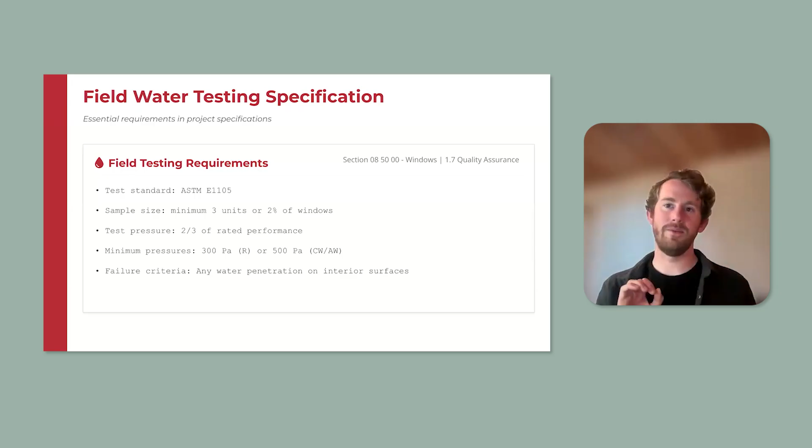So this is where that NAFS label compliance versus what you're asking for test pressures is really important to get in combination. So the test method is E1105 currently. That's the only one we have. There is a 440.8 that's coming from CSA, which I think is an improvement from E1105. I'm really hopeful over the next 5 years or so we'll start to see that trickle into specifications. But yeah, I'm going to leave it to you guys to ask more specific questions about field testing.

It is one of these weird areas where currently there is just no professionals at the water testing side unless you're getting an envelope consultant involved. And I will just say BC is doing a great job on this. I think many of the sites have adapted and matured to a place that water testing is reasonable. Anybody that's done enough water testing knows that that is a team effort. The GC, the envelope consultant, the window and door manufacturer, and the installer should all be on the same team, working to figure out how to make sure that works. When the pointing starts, that's where it all kind of breaks down. We stop actually working towards a solution.

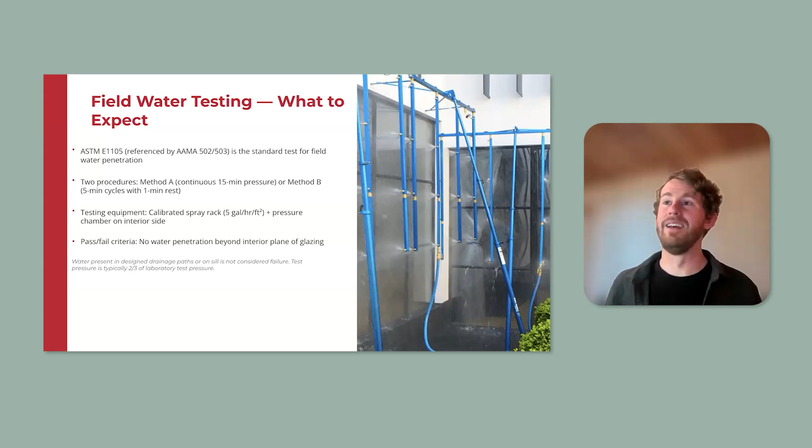It just becomes who's the most liable for this, because it's really expensive to start doing testing on an entire building. So there's a lot of conversation we could be having about water testing, and I will leave it to you guys to ask more questions about it.

Air tightness testing is becoming more common, oftentimes it's in specifications. There is lab testing and field testing again. They are two different things. There technically is field testing for products specifically. It's called ASTM E783. I've never seen it. If anybody has seen it, I'd be really curious. Whole building testing is a lot more common.

And again, in BC, we have a qualification path through Passive House for the VBBL. And then we also have a typical air tightness requirement, which would be the CAN CGSB 149 or the ASTM E779. What you're trying to do is get a total air tightness. And what I kind of like about what I've seen from projects for air tightness testing, again, this should be a team effort.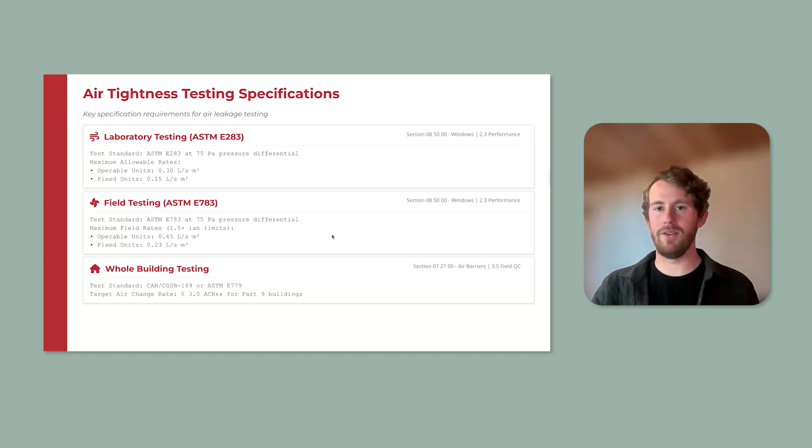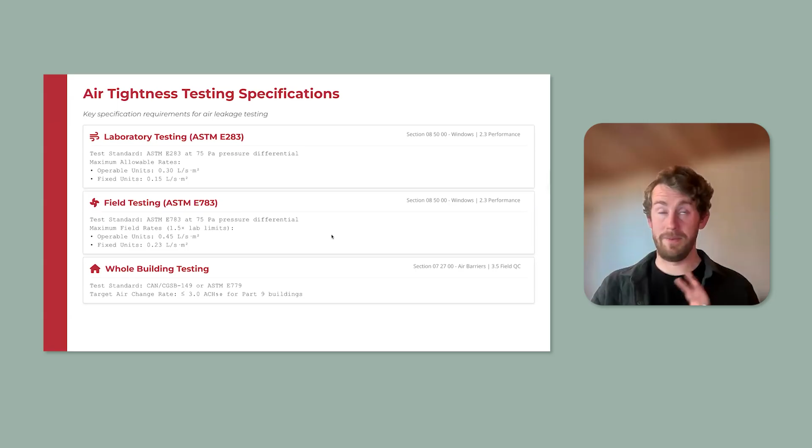Your idea isn't to try to beat up on any one particular element. It's to try to figure out where the air tightness loss is, because in my opinion one of the absolute best things we can do for a high performance building is to get the air tightness right. If you can figure that out, the rest of it gets better. Now, that being said, the rest of your envelope details need to be spot on. Anyway.

All right, so installation. There is a reference in the NBC for A440.4, which is the installation standard. It's not direct. It is getting better in the future. There is some description about sill drainage and a little bit on rain screening. I highly recommend documenting throughout the installation path because it's one of those weird things that you cover up pretty quickly with the rest of the building materials.

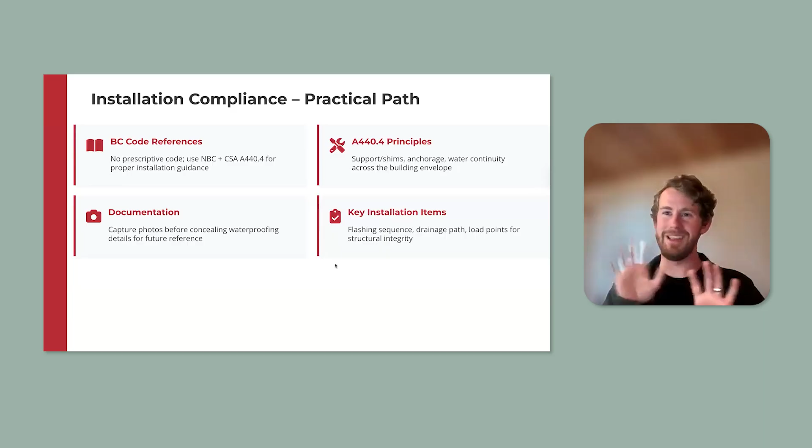The common issues that I saw were poor air and water barriers. So when you're applying the sill pan, the non-permeable pan for a window, fish mouthing is really common if you don't apply the corners correctly and get the details in. This is a BC unique problem, but the whole metal sill angle at the back of the window is really hard to detail, and people screw that up a lot. So I can't emphasize enough: take pictures during that first set of the sill pan if you can.

Non-continuous interior seals are a problem. Most of the country uses spray foam for their installation interior method. I have some serious reservations about that. I don't have time to go into that in detail because it's a gripe. But making sure your interior seal is continuous is absolutely critical.

Another item that is really important is that your rough open framing has enough space that your window can deflect as appropriate to the building. The building's going to shift and the product is going to shift. If you shove a window into a wall, as I used to say, the window's not going to win the battle between the wall and the window. The wall is going to crush that window every time. And worse, when that happens, the window is not going to recover from it.

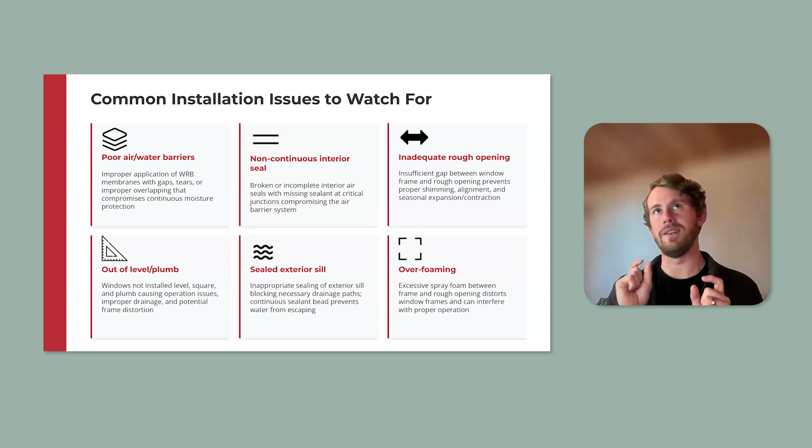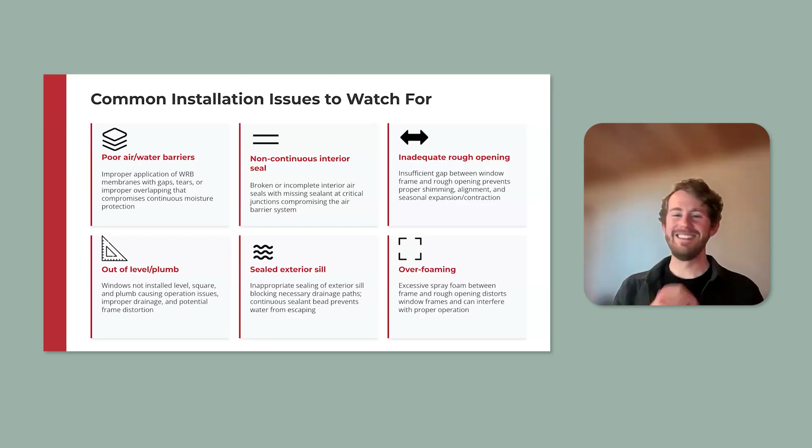So it's really important that you provide rough open spacing appropriate for a window. That's going to be anywhere between 1/4 inch to 3/4 inches, depending on the manufacturer you're talking to and the type of attachment method they're using. Windows being level, plumb, and square are critical. And I've run out of time. I'm very sorry. So just going through a couple quick things.

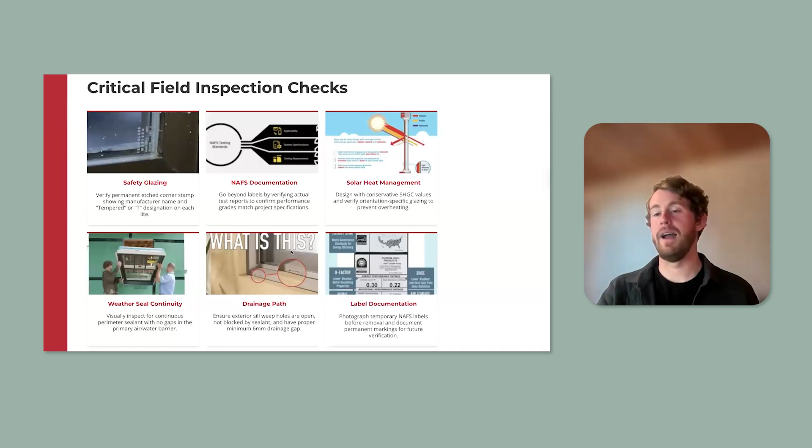Solar heat gain's coming. Renovation is going to be a thing the next code cycle, so expect some alterations to existing building changes. Fire resistant glazing is a conversation we're having in the background. Embodied carbon is a huge conversation. I gave you a bit of a critical field inspection checklist. I provided this PDF to Jenna, so it'll be available to you guys. And there are a series of resources I've provided from Fenestration Canada and from a couple others.